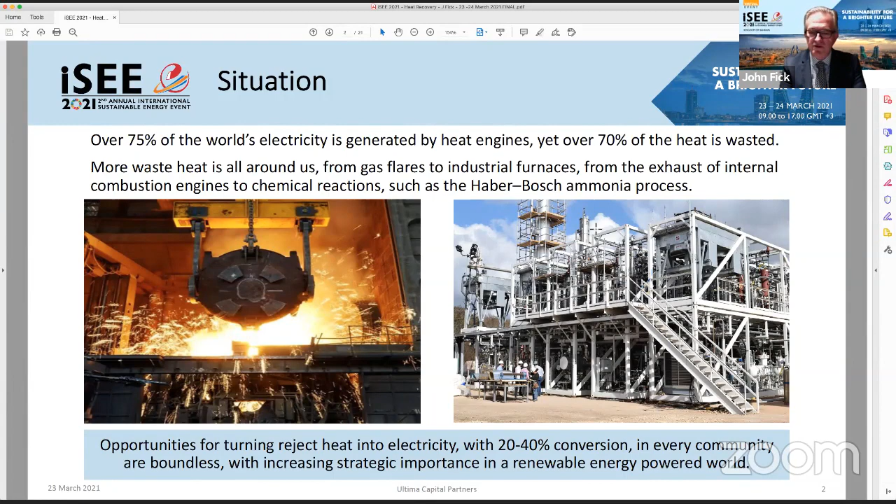So what's the situation? Well presently, over 75% of the world's electricity is generated by heat engines, and yet over 70% of that heat is wasted. And more waste heat surrounds us, from gas flares, industrial furnaces, from the exhaust of internal combustion engines to chemical reactions, illustrated here, for example, on the right, is the Haber-Bosch ammonia process plant. The opportunities for turning reject heat into electricity with conversion ranges possibly in the range of 20 to 40%, in every community are boundless, with increasing strategic importance in an increasingly renewable energy-powered world.

So why is waste heat recovery important? Well, thermal energy recovery is very complementary and additive to all of the existing energy efficiency technologies. It's very relevant in a clean, renewable generation future. Thermal heat recovery improves the commercial returns of behind-the-meter distributed generation and makes significant reductions to the carbon impost of high heat commercial and industrial processes. Now, we are advancing energy generation and efficiency technology in a new direction that will prevent, globally, increasing trends of energy lost to heat. I'll cover a bit more of this in oncoming slides. And of course, there's very significant benefits to the environment, the economy, and to adopting enterprises.

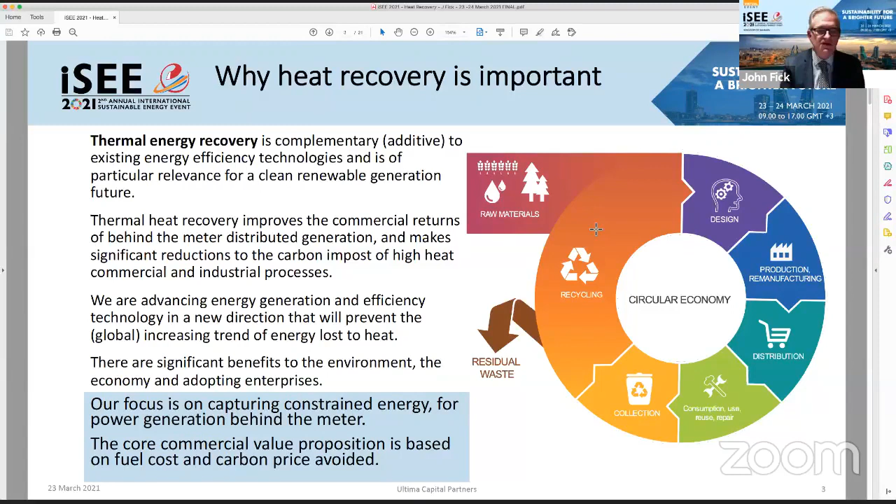Now, our focus is on capturing constrained energy for power generation behind the meter. The core commercial value proposition is based on fuel cost and carbon price avoided. What's the scale of this opportunity?

I'm just bringing up here a slide from Lawrence Livermore National Laboratories in the United States, 2019, United States energy flows. This particular diagram on the left shows the sources of energy consumed in the economy of the United States, and on the right, the sinks. Work done through energy services, and the balance is reject heat, one might call it waste heat. Now, the world is increasing the creation of rejected energy every year.

We already heard a little bit of that from Pat Scheel in talking about increasing electrification, and within electrified societies, increasing HVAC loads, for example, amongst others. So thermal energy recovery provides a partial solution to convert some of that rejected energy back into energy, completing somewhat of a circular economy

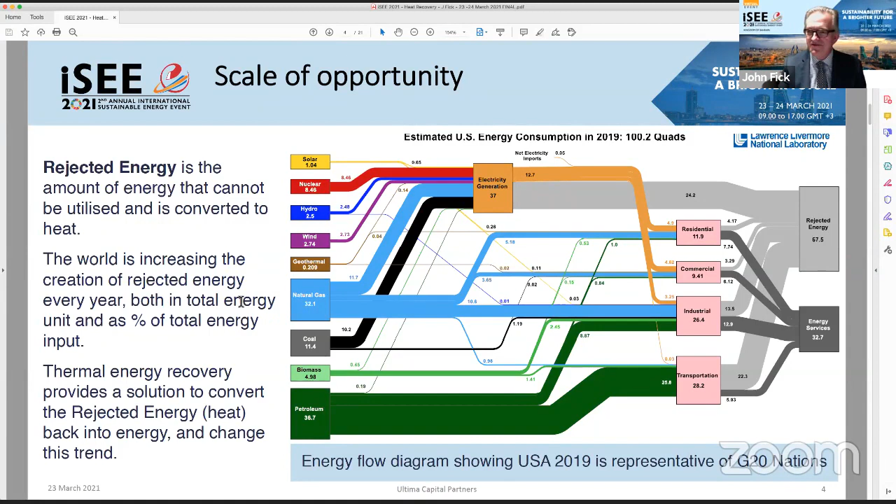for energy. Now, I've had the liberty of attaching to the presentation for your future reference a number of other local economies, the Kingdom of Bahrain. Unfortunately, the most recent such diagram that we could obtain was for the year 2011. And in the case of the United States, the rejected energy proportion was about 68%. Here in Bahrain, it is 63%.

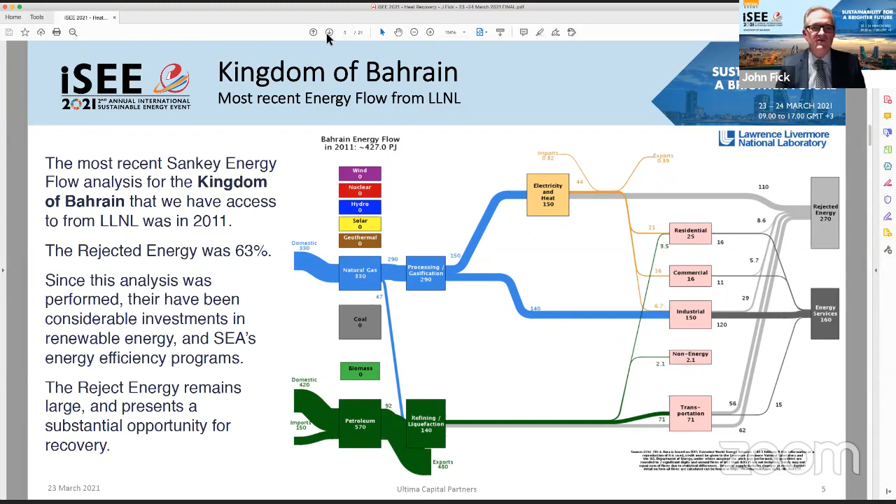So the reject energy opportunity is significant, and we'll focus on which particular applications will be of interest. I've also included some other regional GCC member states, the Kingdom of Saudi Arabia, again, not indifferent to the Bahrain situation from the point of view of natural gas and petroleum. And in the case of all of these countries, we'll see that the source of energy from renewables has escalated significantly and notably since 2011.

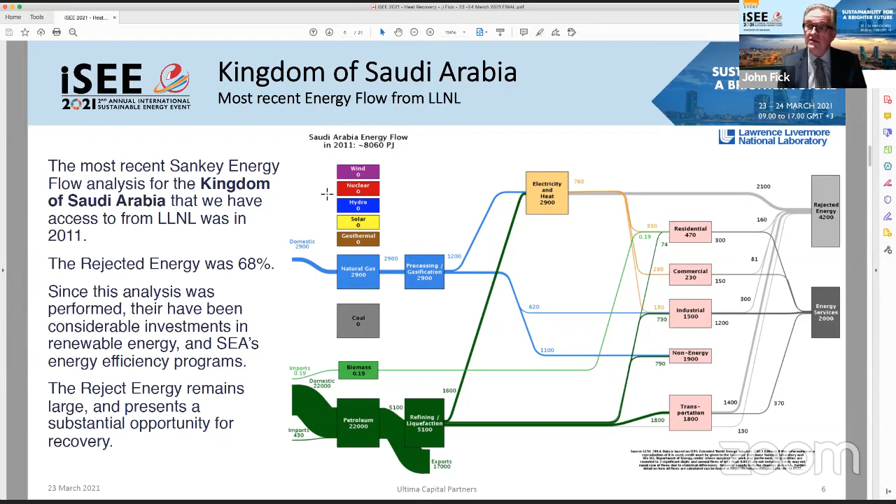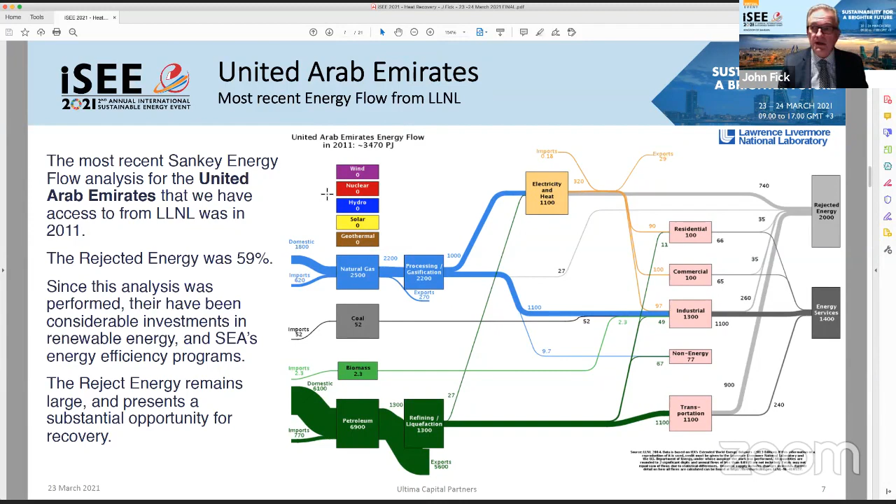And perhaps at the next event, we might be able to track and highlight the evolution in revised diagrams. We've also included, for completeness here, the United Arab Emirates, very, very similar to the neighbouring states in terms of energy sourcing. And again, 2011, our apologies for not being able to source anything more recent, but we're working on that.

So some basic metrics. Worldwide, there is a massive amount of heat from industrial process that's just dumped into the atmosphere and wasted. So in Europe, in 2015, approximately 300 terawatt hours was rejected. In Australia, the percentage of waste heat rejected is similar, even with all the expected energy efficiency and decarbonisation initiatives afoot. So well over 50% of industrial energy use is to produce temperatures above 350 degrees C, and these are temperatures that facilitate relatively efficient conversion of heat to electricity, which we'll go through.

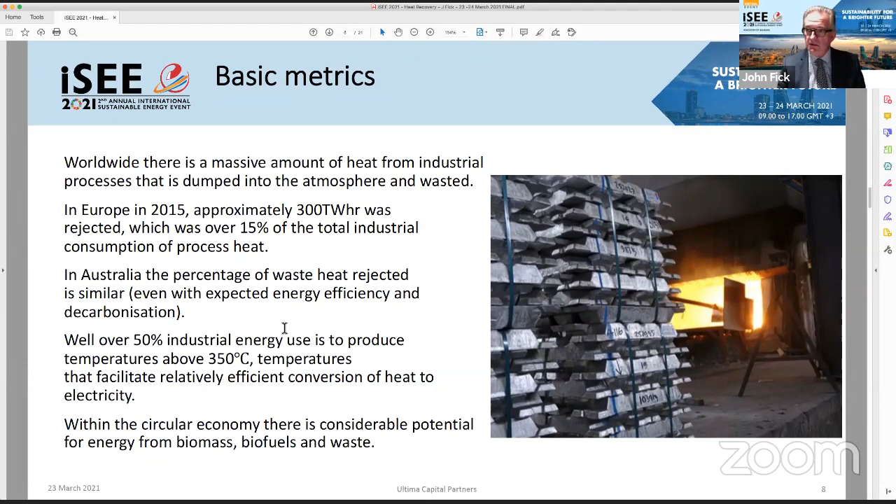And within emerging and evolving circular economy for energy, there's also considerable potential for energy to be extracted from biomass, biofuels, and waste.

So we think about a thermal energy roadmap, and the energy inputs into the energy economy now include reject heat, because we can recycle that, but also PV, wind, concentrated solar, bioenergy, and fossil fuels traditionally. Now, in the case of thermal energy conversion systems that we're focused on, we'd also focus on thermal energy storage. That's very important so that we can address episodic, intermittent thermal sources and level those.

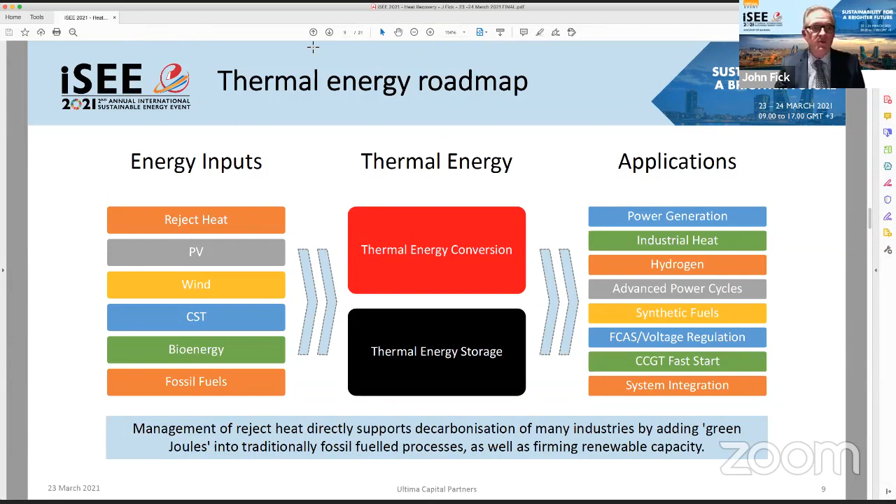In fact, thermal energy storage becomes effectively an energy battery, and that becomes very important for providing other applications: power generation, non-stop industrial heat, advanced power cycles, fast start gas turbine systems. So the management of reject heat directly supports decarbonisation of many industries. We call that adding a green Joule into traditional fossil fueled processes, as well as firming renewable capacities for wind and solar.

Getting a bit technical, I won't dwell on this, but there's a sample of thermodynamic cycles for illustrative purposes. We'll talk a little bit about the organic Rankine cycle, also about the Kalina cycle, and we've looked at the trilateral flash cycle that's been used in geothermal applications, another renewable form of heat conversion.

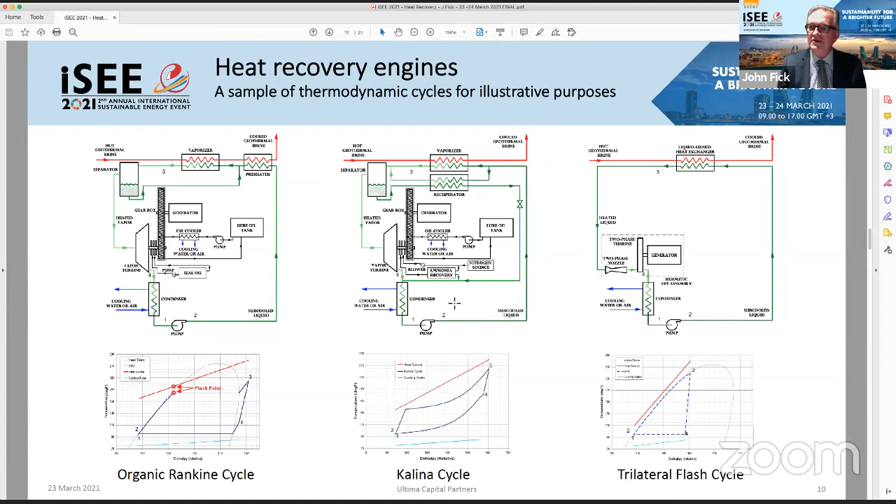Okay, so commercial thermal cycles. Well, commercially available lower temperature thermal engines include the organic Rankine cycle, which I've just highlighted, the Kalina cycle, typically ammonia based, and the Ericsson cycle. The first two are using working fluids and gases that may also be contributing to global warming.

In the case of future developments, that might include supercritical CO2 cycles, we can expect to see at higher temperature systems significant increases in efficiencies. Although ORC at lower temperatures, less than 300 degrees C, can operate in a range delivering perhaps up to 20% conversion efficiencies, depending upon many application specific parameters.

And a gas-powered cycle, not using a liquid working fluid but gas, the Ericsson cycle is one such example, and it does have significantly higher potential. It's one that we've been focusing on to address that 50% plus industrial waste heat energy application.

There have been many engineering barriers in the case of workability of Ericsson cycle engines, and I've listed some of the details there, but they're now being resolved by one of our enterprises, which we have tagged as the UCP JV. I'll talk a bit about that, but we are bringing to market an advanced Ericsson cycle, achieving almost twice the energy conversion efficiency of the Rankine cycle.

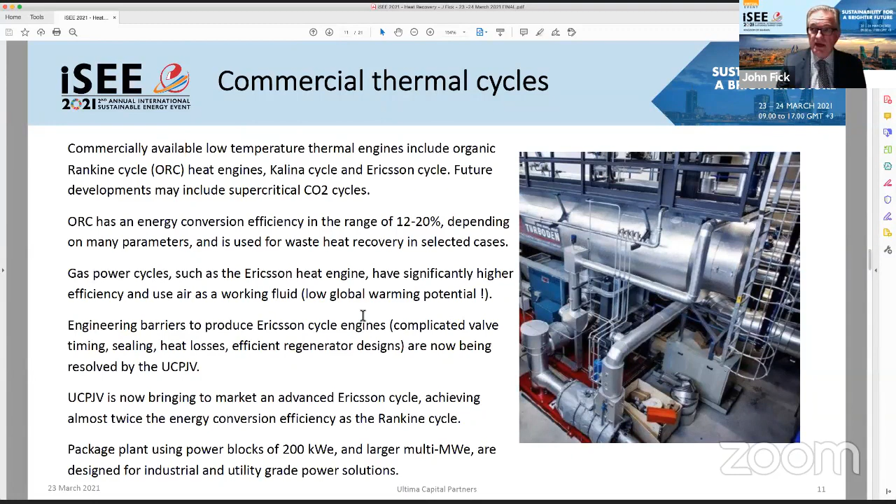The Barton engine, which we're pleased to be advancing, is a form of Ericsson cycle. It's a recuperated closed-loop piston cylinder Brayton cycle that generates up to 3 times the electricity from the same heat source as less efficient alternatives. So that's quite a radical step.

The thermal engine improves the power density and efficiency to achieve competitive cost per megawatt hour, and also allows integration very efficiently with a variety of heat sources, including thermal energy storage systems.

Now, the key features that we look for in a useful system, I've listed here, but in particular, quick start and quick shutdown is important, as is higher efficiency at part load, with modular systems and reliability suitable for utility grade applications with high availability. And when coupled with thermal energy storage, these lead to non-stop dispatchable power solutions.

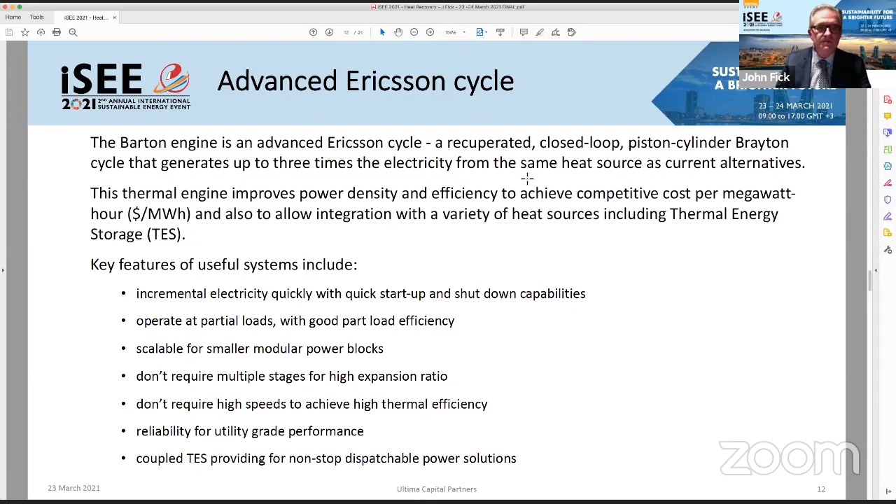So the next generation we've talked about is the UCP JV, and we're developing to application stage in Australia the advanced Ericsson cycle. Working with a national energy laboratory, CRC RACE 2030, in which our organisation, Ultima Capital Partners, is the leading partner, our partnership is investing over $20 million into further enhancing the performance of the next generation, what we call the Barton cycle.

So this leading technology features enhanced power density and efficiency, and it allows integration with heat sources, including large-scale thermal energy batteries.

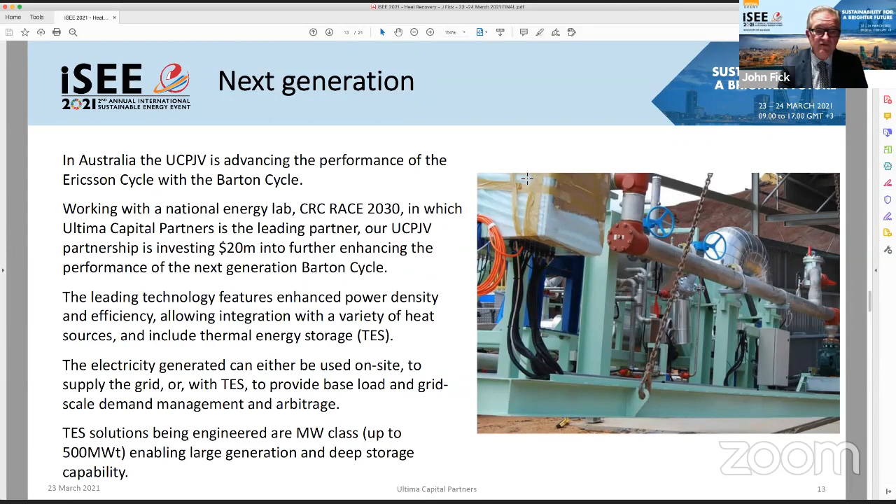Speaking about thermal energy storage solutions, the systems being engineered at the moment are megawatt class, modular, but up to 500 megawatt thermal, enabling very large generation and deep storage capabilities. The applications are varied and wide, and the target end customer market includes designers, builders, operators, and owners of capital-intensive assets that create waste heat.

Simply, the higher the waste heat temperature, the better, because thermodynamic efficiency improves with increasing temperature. Our focus is for customers with waste heat sources in two ranges. One, 300 degrees Celsius or higher, spanning incinerators, treatment plants, gas flares, industrial furnaces, cement kilns, gas turbine or diesel engines, glass furnaces — a very broad ranging set of opportunities and significant energy conversion opportunities. At the lower temperature range, there's also an equally large number of opportunities spanning boilers, various forms of internal combustion engines, aluminium smelter flue gases, solar thermal collectors, and so on. So there's a very broad range there.

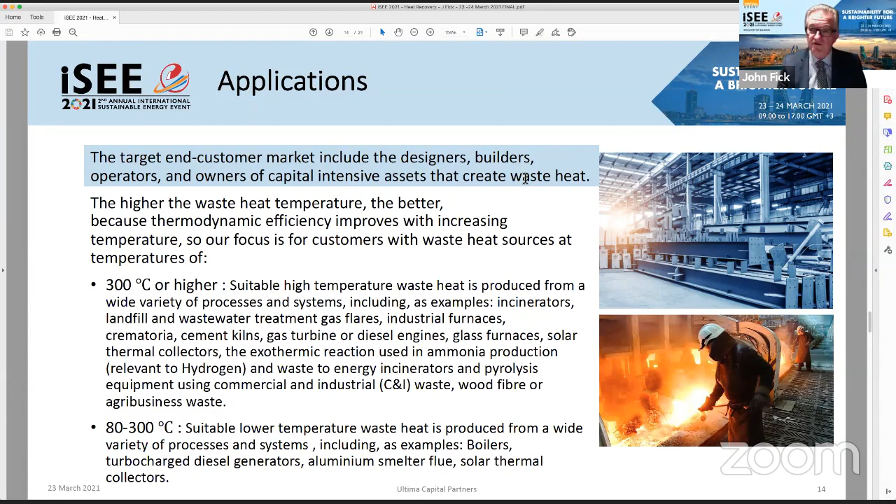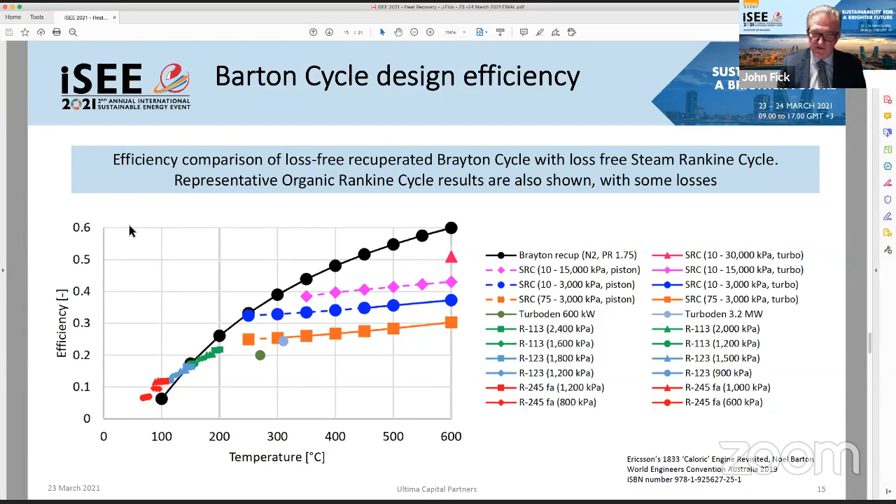What are the design efficiencies? The black line here with the black dots is the cycle we're focused on, the very high efficiency Barton cycle, and we compare that to other cycles and working fluids that we've studied in great detail in recent years. The Barton cycle design efficiency we're working on at the moment is optimized around 450 degrees Celsius as the operating temperature, and the reason we've done this is to minimize the complications with advanced materials. This is very important for cost and robustness of the system.

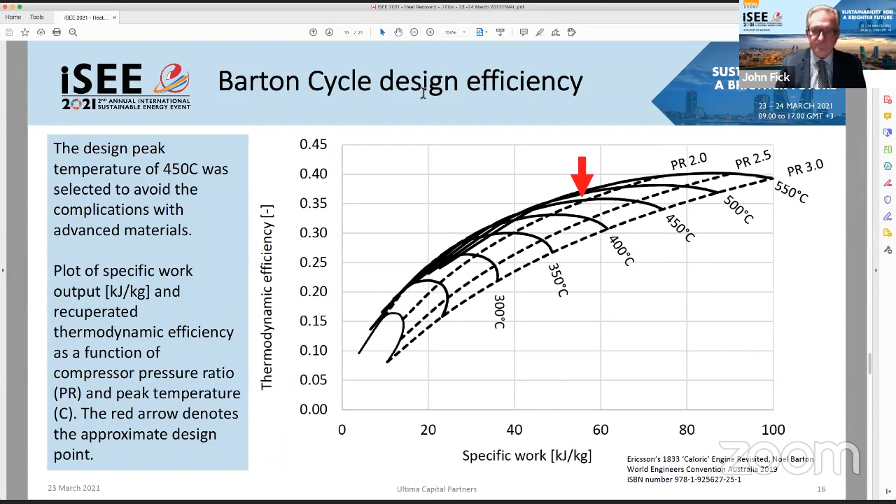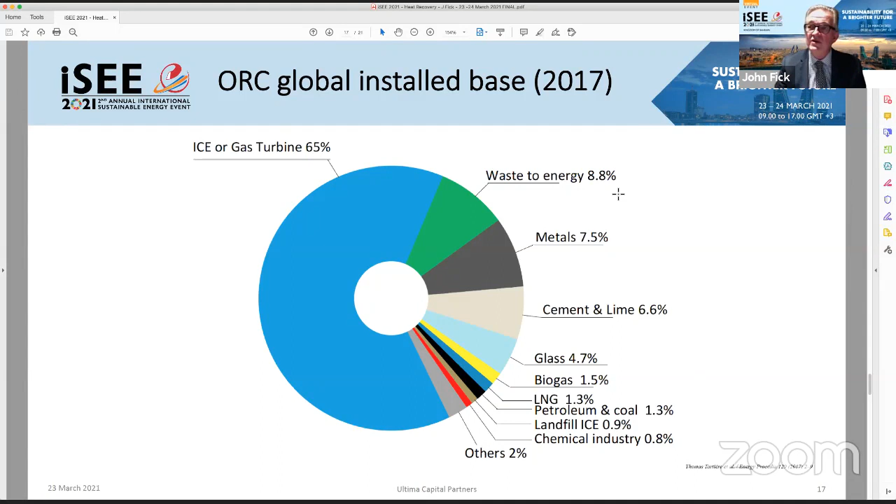I'll come back to ORC because ORC has had to date a larger penetration than the other examples, and there's over 700 ORC installations worldwide, with the bulk of them on reject heat recovery for internal combustion engine and gas turbines — about two thirds of those applications. For the rest, waste to energy is the next largest, and we've had some experiences in a number of these applications over the years.

And of course, there is a clear link between energy price — crude oil price has been correlated with the interest shown in energy recovery systems. But we're going to see further increases in the application here because of the CO2 climate effects, and many organisations now will be factoring in internal carbon price, so more sophisticated multinational organisations and government agencies will be doing that.

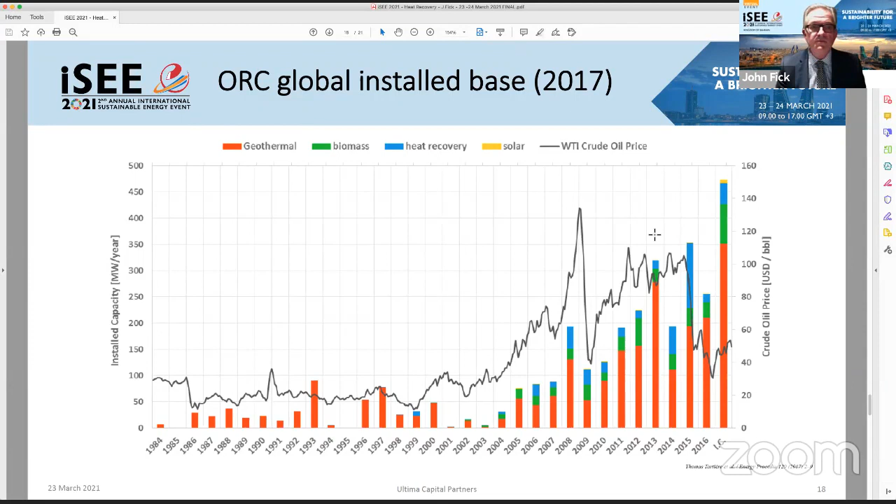So applications in the desert. We've started a program with a Sustainable Energy Authority in Bahrain. I'm very pleased to be part of that, and our organisation is working at the moment to identify pilot project sites for thermal energy recovery in industrial and commercial applications. This will set a very solid foundation for local experience and local demonstration of these technologies across the GCC.

So what are our interests? Our interests are for developing commercial collaboration within Bahrain for wider business across the GCC, to deploy a number of pilot programs with selected industry as a prelude to scale adoption. Once we've undertaken deployment and verification activities, the local case studies will be documented and will serve as a basis for further informed investment locally.

Our organisation in time will be interested in local joint venture manufacturing in Bahrain for export across the GCC. We're also interested in establishing a technology centre in Bahrain to support regional collaboration with industry, universities, system integration, demonstration, regulation, training, and ongoing development of ancillary technologies. And I think importantly, we're interested in expanding an investment platform for the region that can deliver thermal energy recovery projects on a power by the hour basis, a form of PPA. This is going to become a very rapidly emerging asset class.

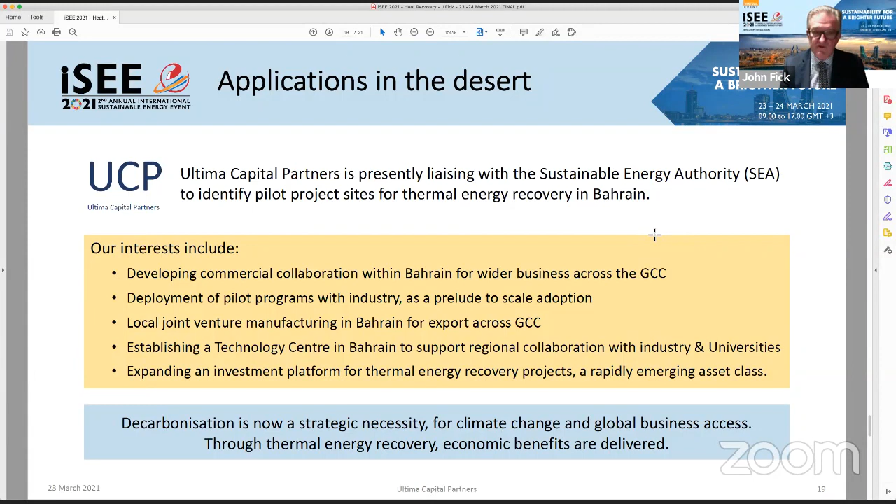Decarbonisation is now a strategic necessity for climate change and global business access, with carbon barriers looming. Through thermal energy recovery, we can contribute to economic benefits being delivered to enterprise. In final form, our team have decades of thermal, power, utility, and energy services expertise. We're based in Australia, but we have global partnerships, with resources and expertise in modelling and simulation, design and development of systems, their application in selected industries, and importantly, verification.

The types of solutions we spend our time on are not just technical but also financial, looking at how to package energy services, power by the hour, project financing, and joint venture arrangements. That spans the stack of subsystems from heat exchangers, thermal energy storage, thermal conversion cycles, process integration with the application process, and ultimately turnkey projects.

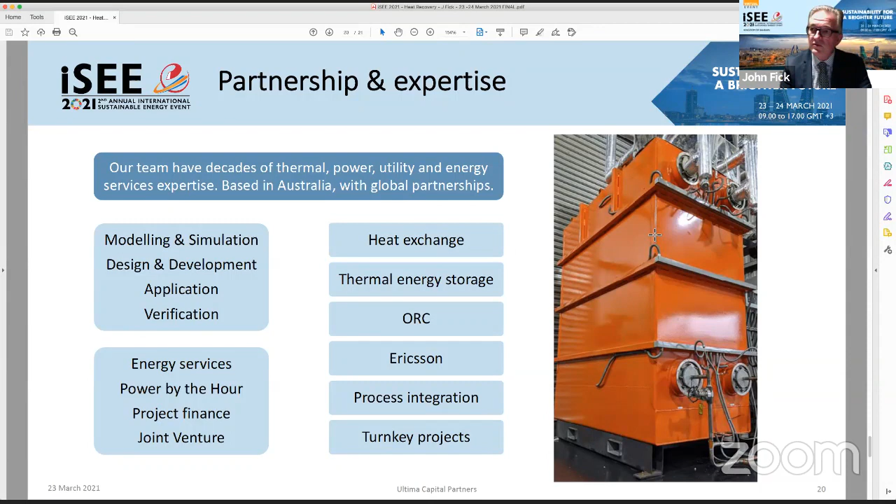I'd like to thank you very much for your interest in waste heat recovery opportunities and that future in Bahrain and the GCC. Our aim, simply for all of our clients, is to unlock superior value, and through this type of mission, we're certainly in a good place. So thank you very much, ladies and gentlemen.

Professor Fick, thank you for your presentation and all the insights and fantastic graphs. The Sankey diagrams are excellent resources, and as you said, we need to work on updating those, especially for Bahrain from our perspective. Before we delve into any details...